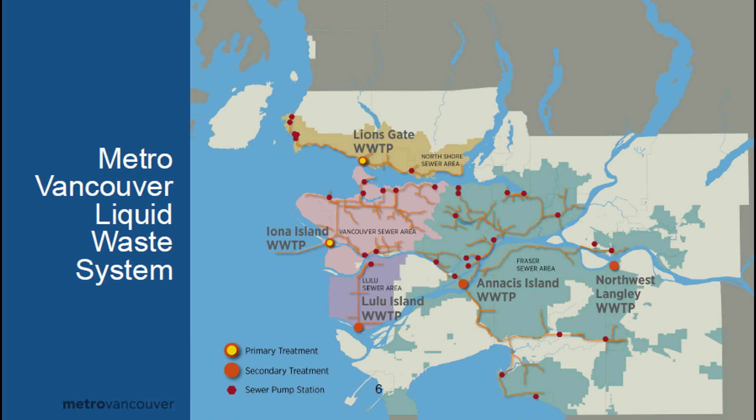I'm glad, Mr. Dobrovolny, that you were here for our discussion about housing. I think you hear that there's a very strong commitment from the District Council to partner with Metro Vancouver on a project going forward. Fortuitous for us to have you holding on the line. Thank you very much, Your Worship and members of Council. Yes, I have been listening and taking notes, and I appreciate it. It was good discussion. Good evening.

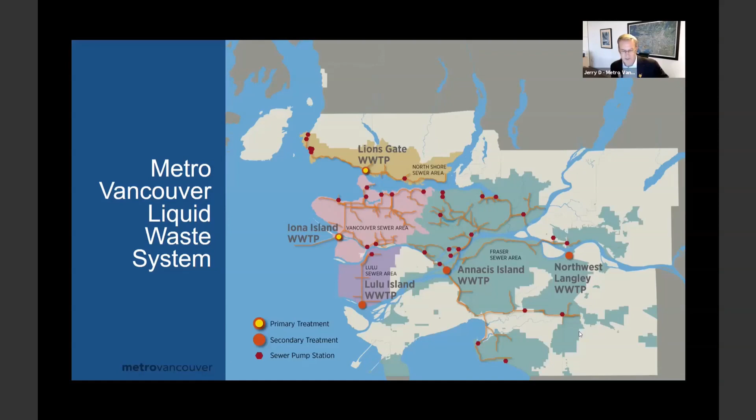Next slide. So it's a very large project and a very exciting project, because we're looking to upgrade from primary treatment to tertiary treatment. And there's growing concern, not only about growing population in the North Shore, but also growing concern around the level of treatment and the impact it has on the marine environment and the marine ecosystem.

We recently had a presentation or a demonstration at the PNE. We had thousands and thousands of people come through our displays there. Related to liquid waste, we received about 5 times the amount of input, 5 to 1, stressing that their number 1 top-of-mind concern around liquid waste was the ecological and environmental impacts of our liquid waste treatment plants. So there's strong support in the community, as you've heard and as you know, for upgrading our plants to tertiary treatment.

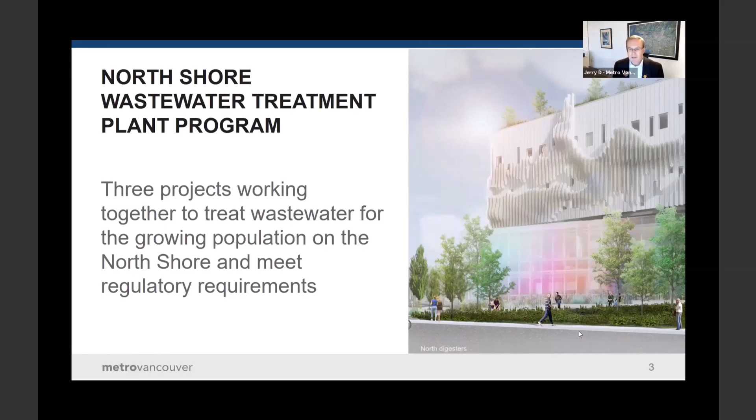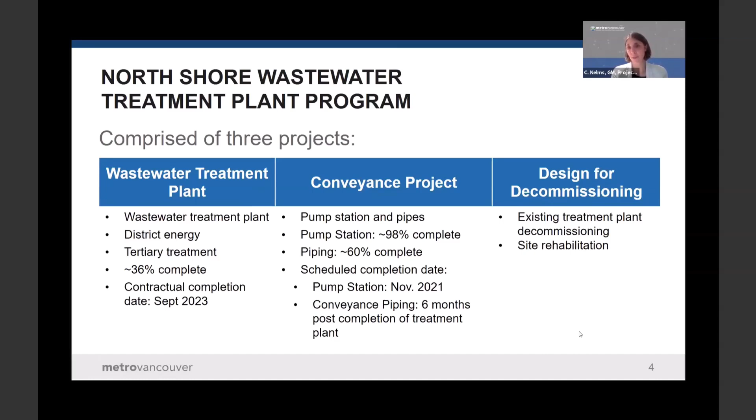Now I'll turn it over to Cheryl to talk a little bit more in detail about the plant and where we are in this update. Through the chair, this program that Jerry's just mentioned comprises 3 key projects, and we'll walk through 2 of them today, the wastewater treatment plant and the conveyance project. The third element is the design for decommissioning.

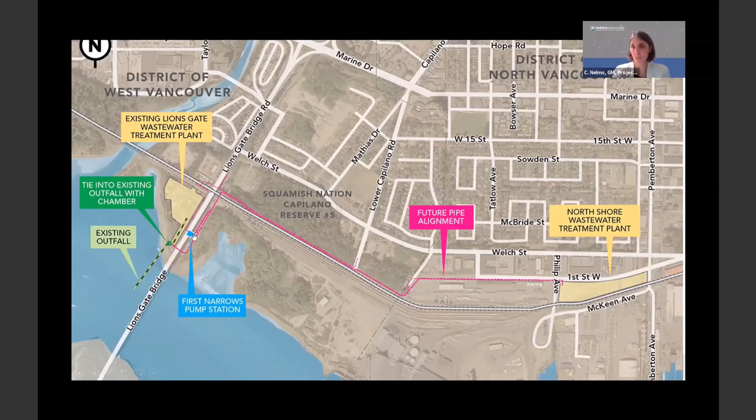When we look at the aerial for the area, just to orient the council, Lions Gate Bridge is here on the west side. This is the existing plant that's just beside the Lions Gate Bridge. You can see the outfall that goes into Burrard Inlet. And the new plant is over here, right at the corner of West 1st Street and Philip Avenue. That's what we call the North Shore Treatment Plant project. From there, there's what we call the conveyance project, which is effectively 2 seven-foot diameter pipes running along this pink alignment to a new pump station right underneath the Lions Gate Bridge. So this gives you the context of the program of work from an aerial perspective.

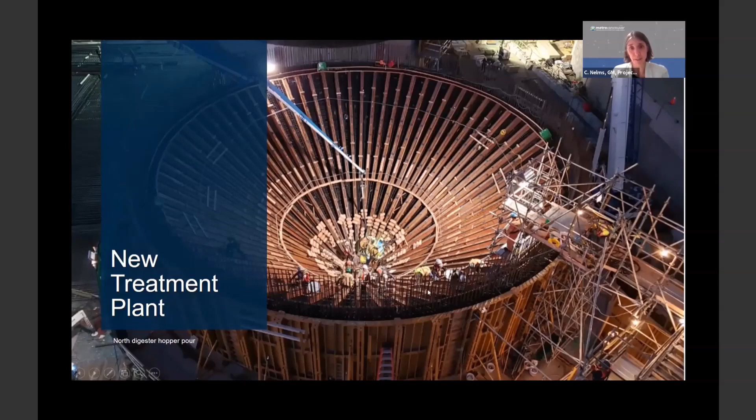I'll walk you through the treatment plant first. This is just an aerial look at some of the construction stage here. We're just building out this digester, on the north side of the plant, built as a conical structure. You can see the formwork here. It's a really complicated piece of work with lots of rebar put in place. I'll walk you through some drone video to show what that looks like right now, as construction has progressed.

When we get this plant at the end, it's going to have some fantastic features. It's going to move us from primary treatment to tertiary, going beyond our regulatory requirement of secondary, but getting us that tertiary treatment that we know will be coming down the line from a regulatory perspective.

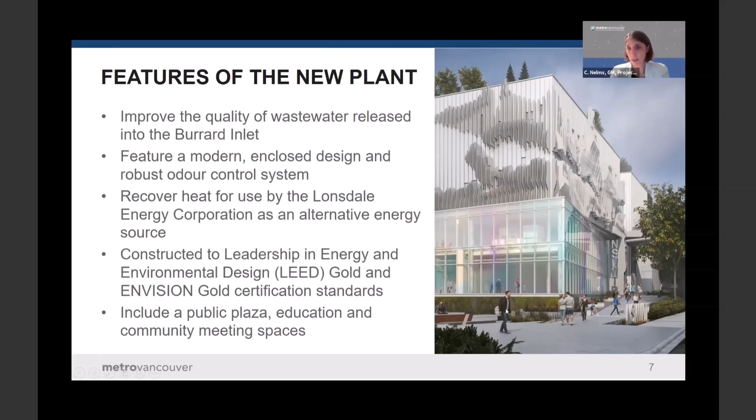This is a much needed requirement for the quality of the effluent that we're looking to put into our water systems. There's going to be a pretty modern looking building, more like an office facility than a basic concrete bunker. This was based on early planning with a lot of community input from neighbors and businesses in the area, and it'll be constructed to LEED standards. There's a public plaza as an amenity, and a district energy system with the goal of reducing greenhouse gas emissions for the project and the local area, in partnership with Lonsdale Energy.

So why tertiary treatment? Jerry just walked through the key elements from a public perspective in terms of their level of interest, and it has the highest concern from our liquid waste portfolio. We're really looking at the need to reduce harmful pollutants that go into our aquatic habitat and impact salmon and killer whales, and other aspects affecting the oxygen needed for those species.

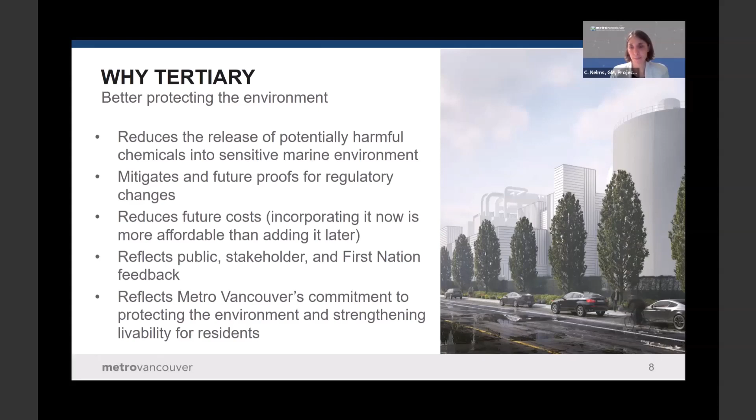It is close to the waterfront, which is normal for a wastewater treatment plant due to the need for proximity to an outfall system and an existing collection system it's connecting to. But being close to the waterfront in British Columbia with our seismic standards does create complications for meeting geotechnical requirements, with some elements needing to be post-disaster ready. There was an aggressive schedule on this project from the beginning, which created challenges for the contractor to meet, although they had signed up for it in the contract.

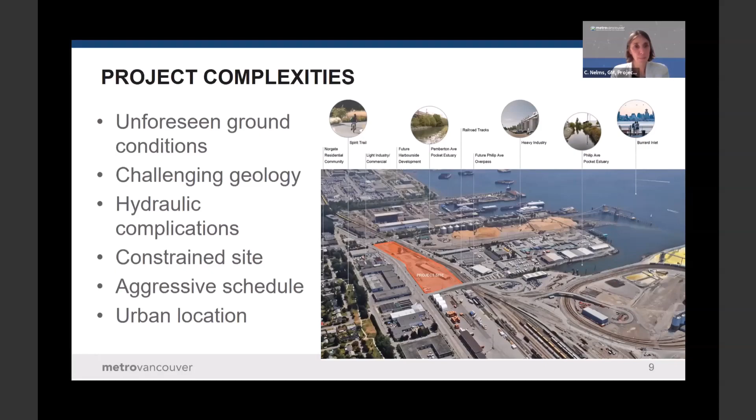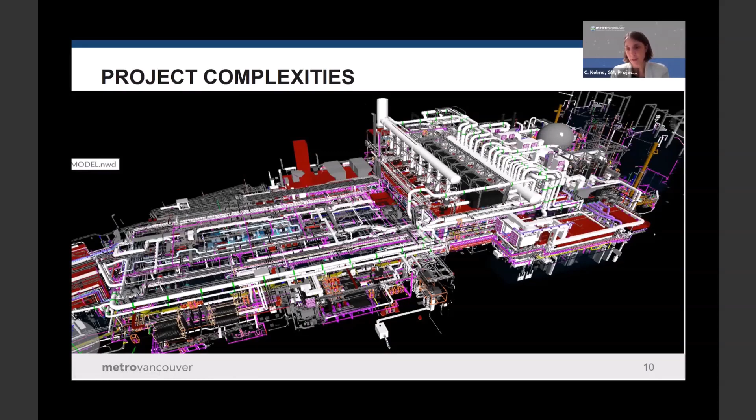This is one of the first stacked wastewater treatment plants in Canada - quite complicated because of the site constraints and the need for tertiary and secondary treatment. I'll move on to the drone video and walk you through it. If you like construction, you'll like this drone video, I think. I'll stop sharing and move to that as we go.

Please bear with me.

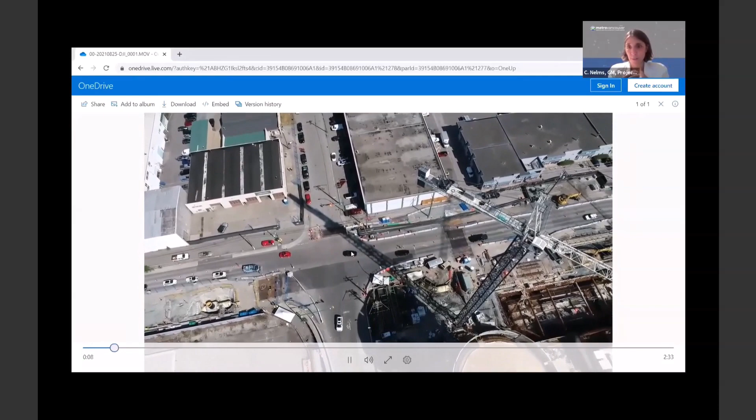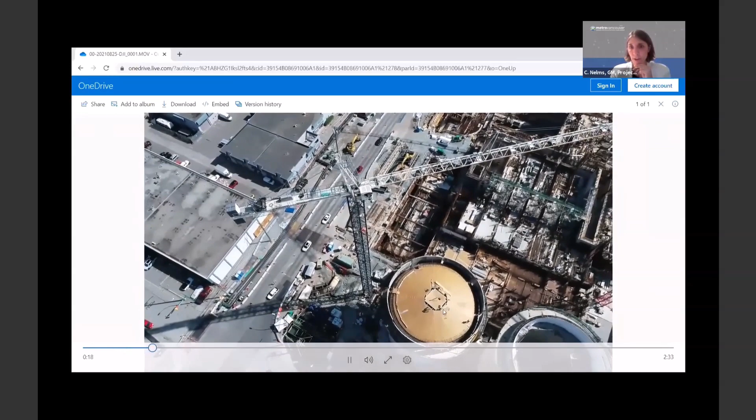We really want to share this video because it shows the progress on the construction site - a bird's eye view of what's going on. We have a lot more access to this. We're at the corner of West First Street and Philip Avenue. You can see the digesters I showed you in that earlier picture - now you can see the concrete is poured on those structures, whereas before you just saw the formwork and rebar.

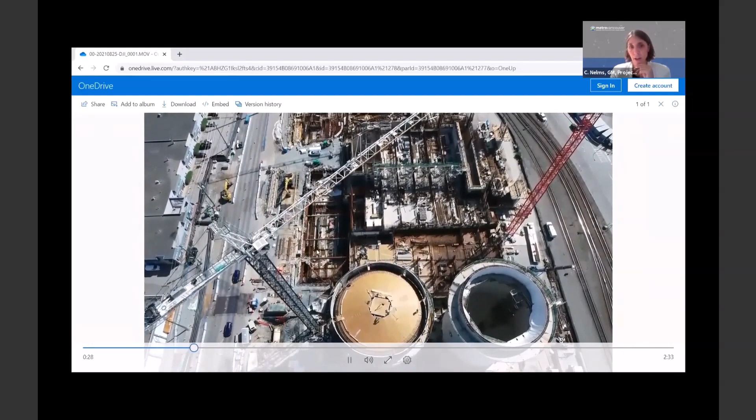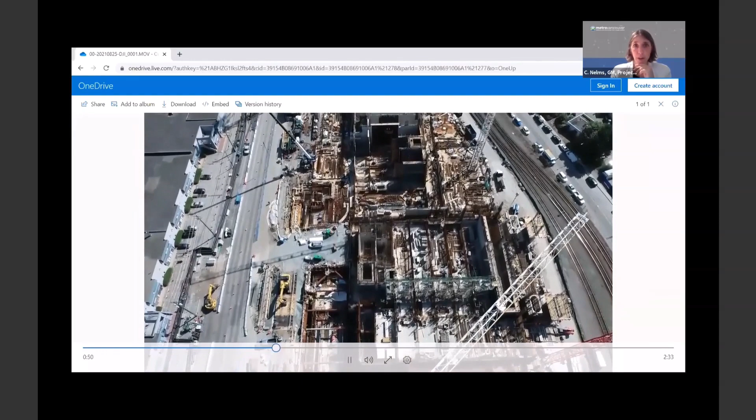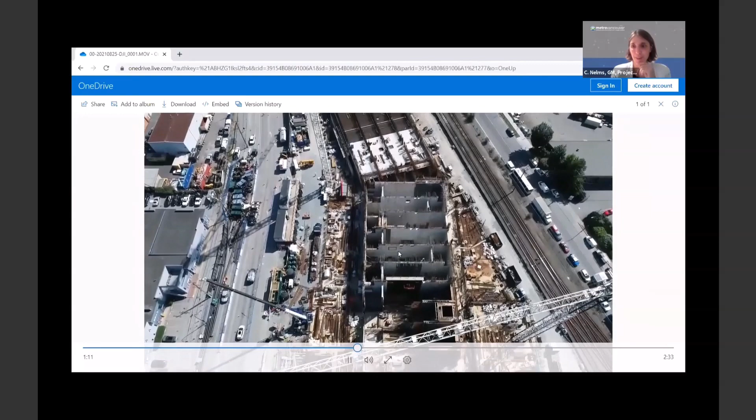For this 8-acre site we have about 5 tower cranes, plus lots of mobile cranes located here. As we move along, you can see a lot of concrete and rebar being placed, with foundations work for our substructure mostly complete at this point. We're now passing through primary treatment and getting into the activated sludge area, where there's bioreactors and tertiary treatment for carrying out the necessary digestion, getting those solids down to less that goes out into our effluent.

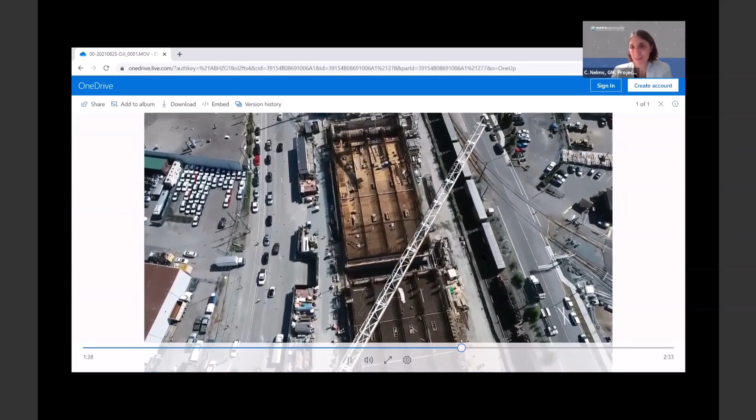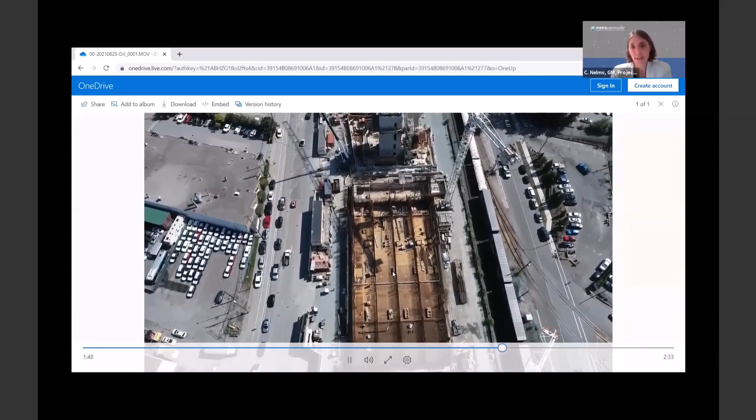Then we're getting into the secondary clarifiers - here you can see we'll have a stacked secondary clarifier system for the site, alongside an active railway. If you've worked around railway systems and rail providers, they're very challenging to work with, but things were well known by our contractor. There are 8 clarifiers on one level for a total of 16 clarifiers, so that's where the stacked aspect of this project comes into place. We're coming close now to the district energy location.

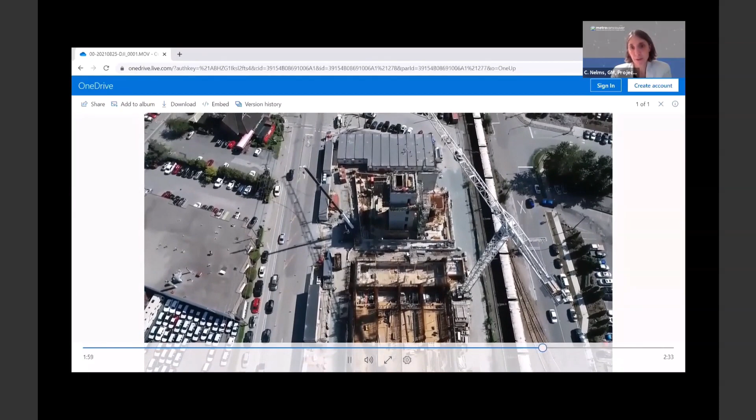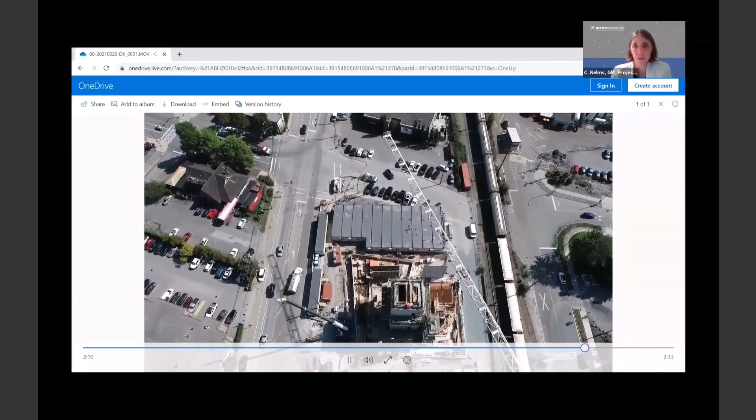You can see some workers right here on the job site, and then we're going to be entering into the office space for the facility and public plaza. This is where our current site offices are for the contractor, Metro Vancouver, and consultants, co-located together.

At a high level, this gives a very good bird's eye view of what's going on, some progress on the job site. At peak periods, we had over 300 people on the job site. Right now, we're under 200 people.

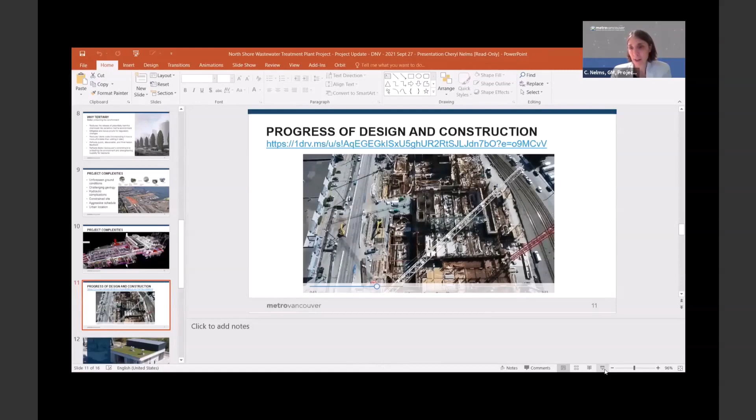Very good progress in general on the treatment plant for a complicated project, but still it is behind schedule. We know there have been challenges with that contractor with respect to schedule and delivery.

On the conveyance side of the program of work, this project has been on schedule and working out very well. This is a picture of the completed pump station that lies right below the Lions Gate Bridge. You can see the piers of the Lions Gate Bridge on the part of the picture, the green roof. There's a big substructure underneath this plant, so there's a lot below the surface here that you can't see, but works that were required to build this pump station.

An interesting aspect of this project that has been very successful, specifically for the conveyance project, has been the addition in our procurement requirements for a required number of hours for hiring members of the Squamish Nation. That has been very successful. There were two components to that procurement requirement for the contractor: one was on employment hours, and the other was employment for apprenticeship hours. We've been able to exceed some of those performance targets, so that has been a very successful piece of this program, and we're taking lessons learned to apply onto other projects.

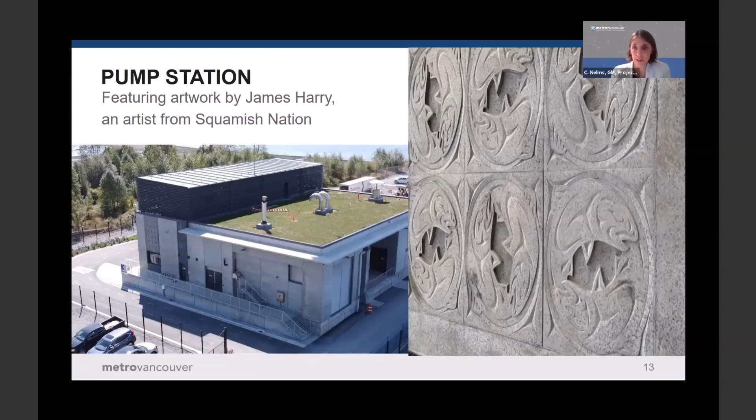Current work, there's more work happening along First Avenue. As we carry out these projects in our member municipalities, we do recognize significant impacts to the public, to businesses, the noise, the traffic. These are things that we really do care about. We've been working alongside the DNV staff to mitigate as much as possible, but there's also just a reality that some of this noise and traffic will happen, as anticipated in the planning process.

But one of the benefits coming out of this is there will be another greenway alongside here, bike paths, and lighting enhancement along this alignment, which will improve safety for pedestrians and cars traveling along that alignment.

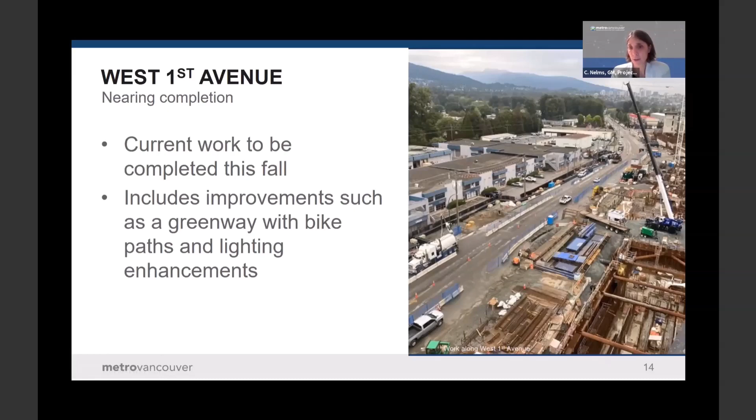Upcoming work, lots of work still to continue on both the plant project. As I mentioned, we are behind schedule on that project based on the contractor's low productivity rates.

So I'll pass it back over to Jerry and let him wrap up our presentation to give you an update on this project. Thanks, Cheryl.

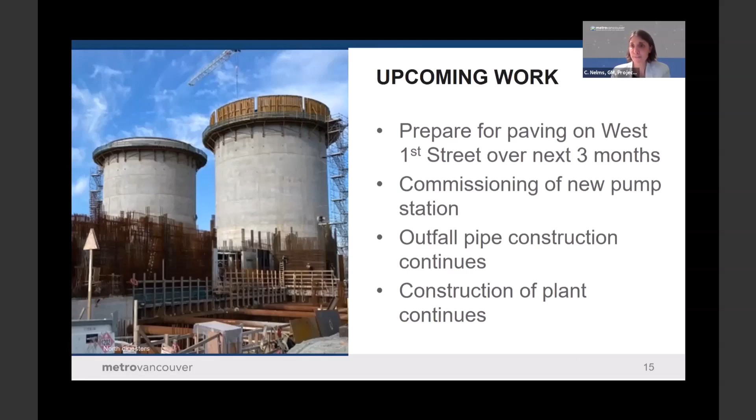Just in summary, as you've heard, it's a very large project, a very complex project, and a difficult project to construct. The contractor is definitely having difficulties. The project is significantly behind schedule and over budget, and we're working hard to try to resolve the issues with the contractor, and those negotiations and discussions continue. We're happy to come back and provide updates. We've committed to update the board monthly, and we're happy to come back either at your request or when we have significant changes to report on. With that, we're happy to answer any questions, and thank you for your time.